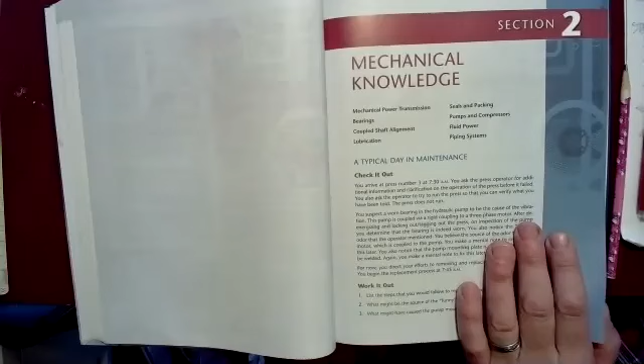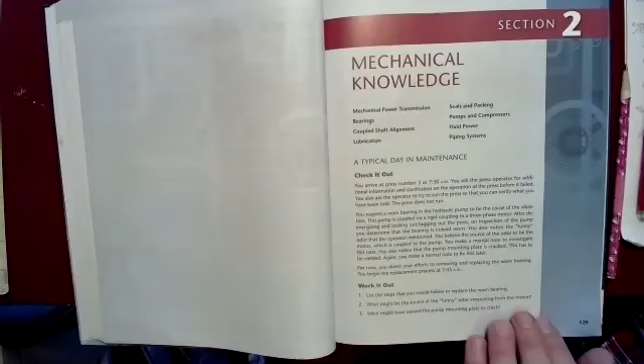So in Chapter 6, we're talking about the beginning of Section 2. Section 2 in the book gets into the mechanical knowledge, and this is pretty much half of the program. It touches on half the program. It's all the good mechanical stuff, and this is a very important aspect of power transmission.

We're going to spend a lot of time in the lab playing with these elements, playing with the V-belts, pulleys, shivs, gearboxes and motors. So we're going to be doing all that in the lab. It's pretty free form, which is why we want to give students as much time as possible. Only one student per lab per system, so you're going to be setting up your entirely own system.

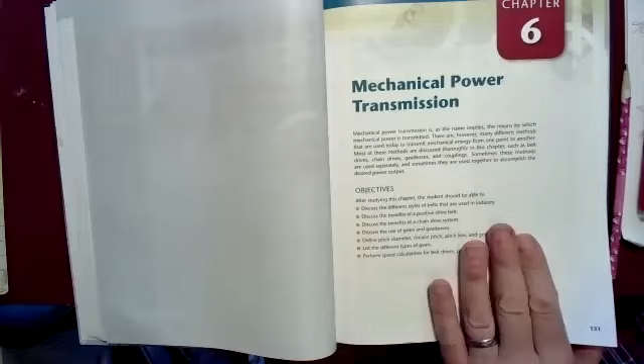So in Chapter 6, we start talking about belts and shivs. Now that's the first bit of important learning. When you're reading the book, you'll recognize that term is called a shiv, not a sheave. A lot of people make that mistake unless you're in the industry. If you know what you're talking about, you're not going to call those things that let belts and V-belts ride in sheaves. You're going to call them shivs.

And so that's a very important distinction. As we get through this, make sure you use that properly pronounced, and you will be a lot smarter sounding to all of your compatriots when you first get on the job site.

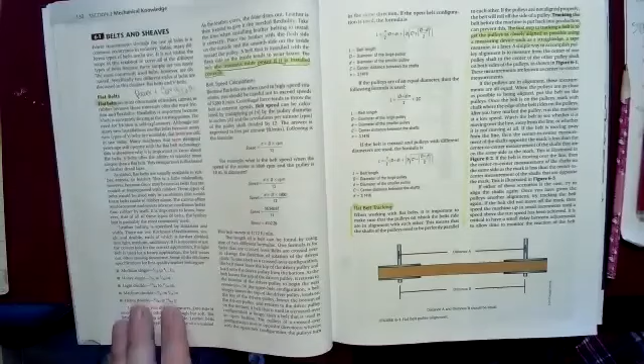The book starts talking about flat belts, and you're going to see a lot of flat belts out there. The book mostly talks about power transmission flat belts. In other words, the idea that you have a drive side, a drive pulley, and then the belt's used to convert the power from the drive pulley to a separate machine or a separate pulley. But in many cases in the real world, you're going to run into flat belts being used as conveyors. They convey material or boxes from one point to another, and there's usually going to be a drive pulley on that conveyor. All the same calculations in terms of tracking also apply to conveyors.

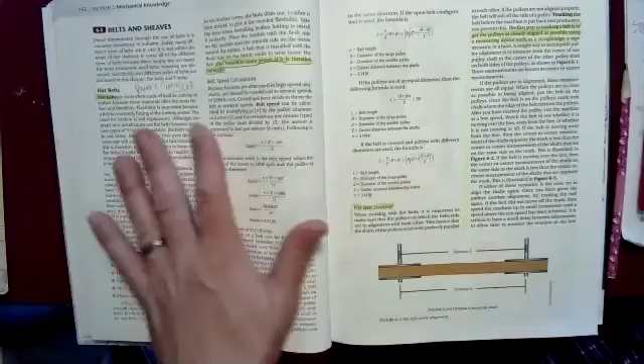The book takes you through a little background, talks about leather, rubber and canvas. Obviously canvas belts are very old school as well. It takes you through the different sizes and a basic speed calculation, which is very simple. All I can say is read through this very carefully. We're probably not going to do a whole lot in terms of calculations on my tests about speed, but understand all these terms. Understand what light duty versus heavy duty versus medium duty really means in terms of belt sizes. Just read through all this.

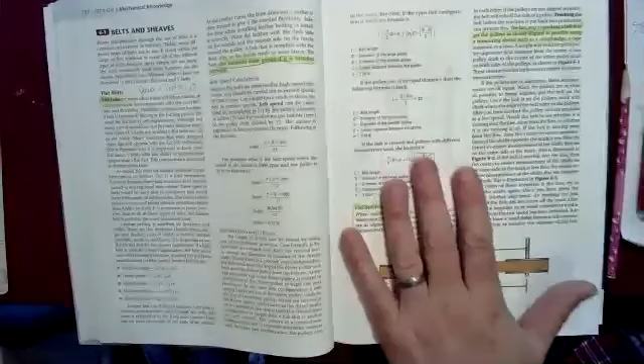The second part in 6.1 is flat belt tracking. Once again, this is really good. I wish I had run into this years ago. It takes you step by step, and I can't highlight this enough—I want to highlight the whole page. It takes you step by step on how to do your belt tracking.

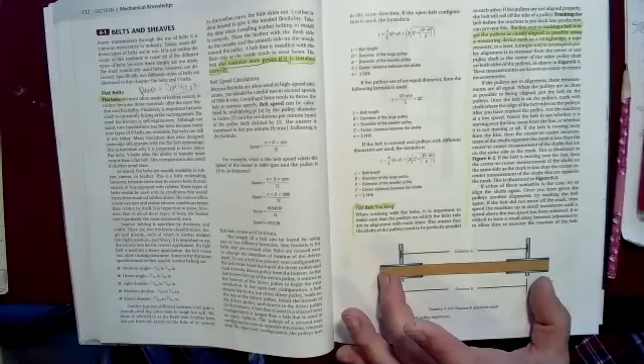The first step is always to do a measurement to make sure that your shafts are parallel, and the distance on one side of the shaft is the same as the distance on the other side. That's usually the best way to do it if you've got two shafts, your drive pulley and your idler pulley, separated by a long distance. You have to use a tape measure to do that, and it's hard to get exactly right. Then it takes you through a methodology with drawings of using something called a witness mark.

So as you track your belt, it wants you to start off really slow. If you speed it up, then the belt goes off quicker. So you start it off slow, make sure it tracks slowly, and then you speed up your system to make sure it stays tracking, and then you make adjustments as you go. The book takes you through all of that stuff. It's really good.

The book talks a little bit about the pulleys, the flat belt pulleys, talks about them needing to be generally larger than the belt. If your pulley is just barely big enough to run your belt on, then your belt starts running off even with a slight variation in the belt tension. Stretches a little bit, you're done. So you want a pulley that's big enough to have a little extra meat to run that belt on. This is really good stuff. Read through that—I can't emphasize it more.

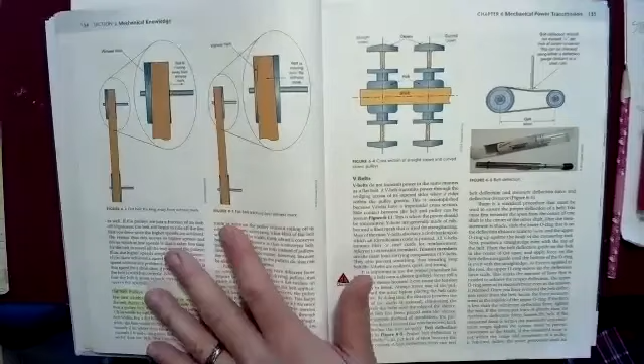Then on page 135, the book gets into V-belts. V-belts are probably more common than flat belts. Now, flat belts in the real world, you're going to run into a lot as conveyors, sometimes as power transmission, but more often as conveyors out in what we have in this region.

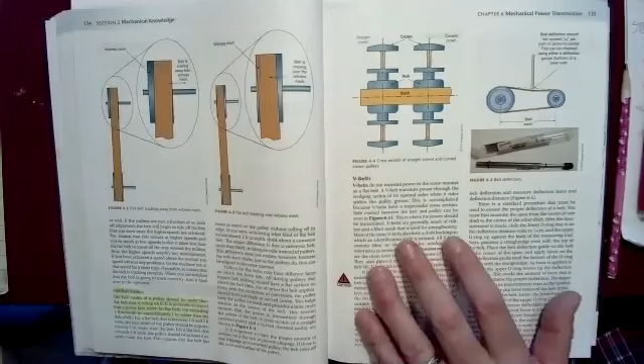V-belts are used everywhere, for power transmission, for pumps, for vehicles. I'm sure you guys have a V-belt running based on your engine, running power out to your fans and to your alternator. V-belts are probably the most common power transmission tool out there, period, of any you're going to run into. And you're going to have to replace these. They wear out, so if your V-belt needs replaced, you're going to have to know how to replace it.

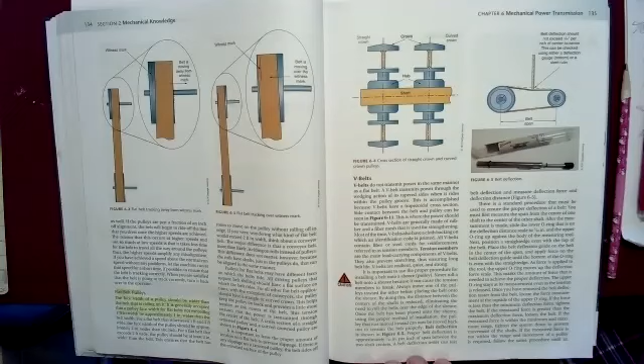The book goes through a whole process of how you install a V-belt. You will need to keep this book with you when we get into the lab. This will tell you how to do the steps in the lab. I'm not going to give you a separate procedure to follow. You will need to use the book, so bring it with you in the lab.

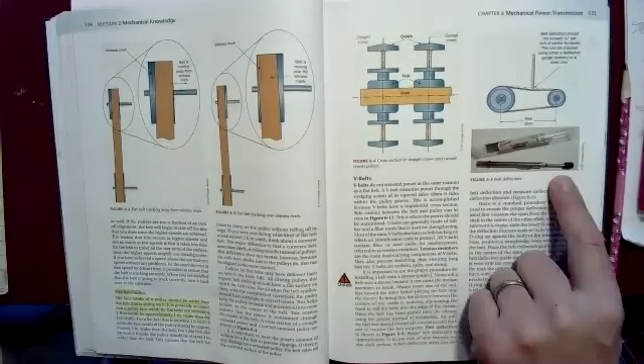You'll be using a tool like this to measure the force you apply, to see how far your V-belt is deflecting. That's a very, very important tool. And here it gives you the rule of thumb that you'll use to verify you have the right tension on your V-belt. I can't emphasize this more. I want to highlight this whole page as well. V-belts are critical, absolutely critical, for power transmission class.

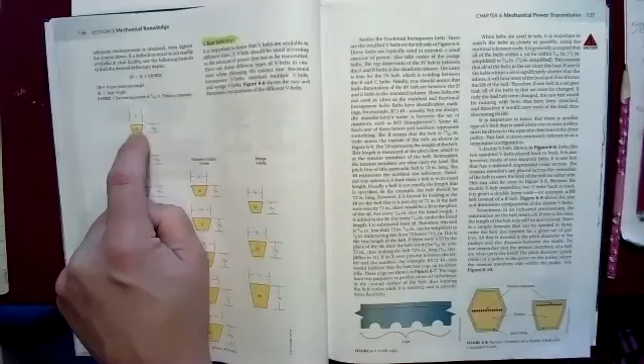On page 136, we're going through the different belt styles, and all these different cross sections. This is roughly to scale, maybe a little less than scale. It shows you all the different cross sections of belts and the codes you use to order that belt. So if you measure your belt and find it's 1/4 inch across and the height is roughly 5/32, we know that's a 2L belt. This is a really good tool to keep on hand, and that's why you want to keep this book on your bookshelf.

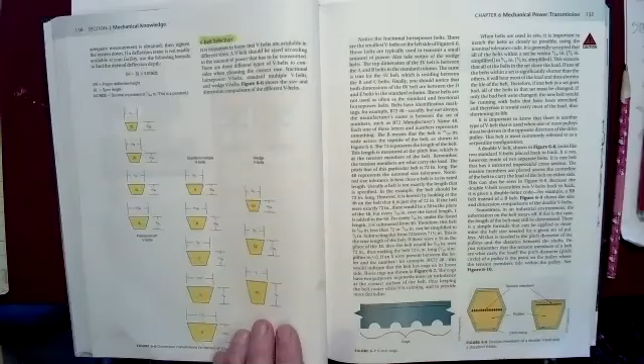Starting on page 136 into 137, it takes you through all the different descriptions of what these different codes mean and why they exist. That's really, really useful. This is the kind of stuff I wish I had a long, long time ago. It talks about double belts, for instance, this guy down here.

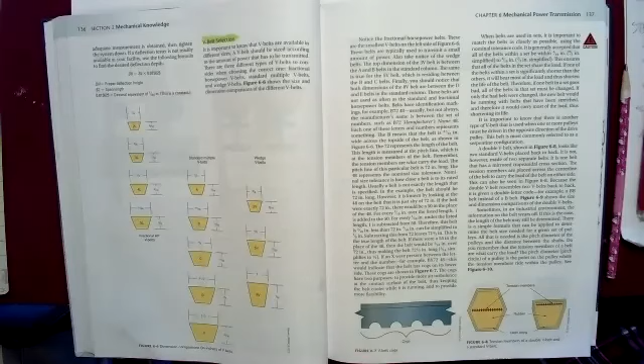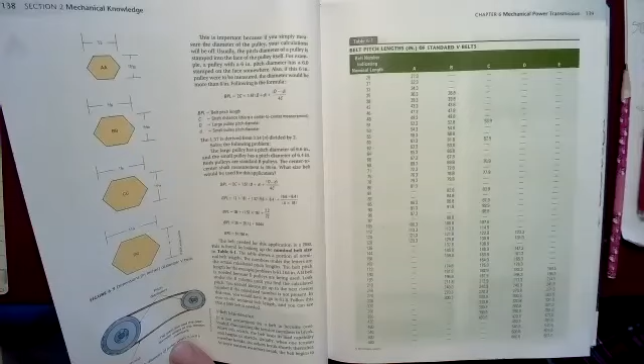It talks about what you do if the information on the belt wears off, and then it talks about how you calculate the length of the belt and that sort of thing. It talks about a pitch diameter. A pitch diameter is how you measure the length of that belt. You need to know the pitch diameter and where you'd find that. It is not the outside edge of the belt, and it is not the inside edge of the belt. It is the line on the belt that determines the optimal pitch of that belt system, and it is used for the measurement of the belt length.

They give you a great table in 6.1 on pitch lengths. So if you have a nominal length, you can calculate your different pitch lengths, depending on the belt style.

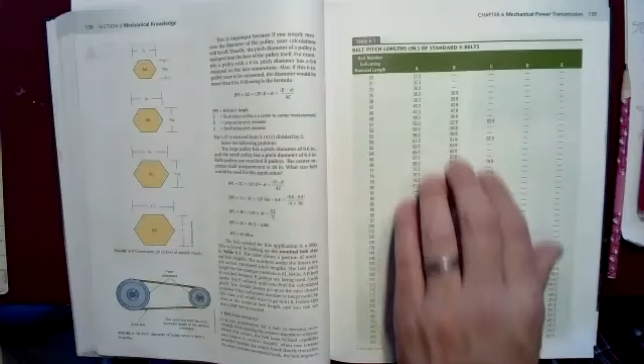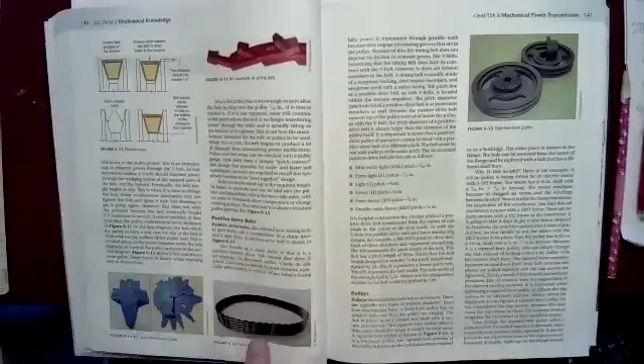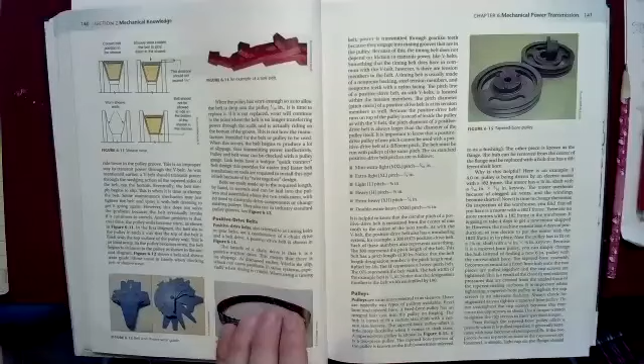And like I said, all that's really good. Now the rest of this chapter has some useful stuff too. It talks about positive drive belts—these are timing belts, typically called timing belts. They're belts with little grooves on the inside to give you a little more force without necessarily having higher tension, and they maintain a certain timing between the different pulleys that run those belts. So it talks about those belts and how they're made.

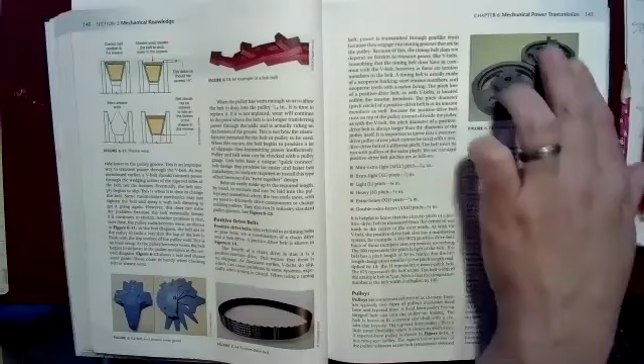In the section on page 141, we go through the different kinds of pulleys out there. It talks about different parts of a pulley and different methods of attaching that pulley to a shaft. There's a variety of different methods—sometimes you have a set screw, sometimes you get these fancy tapered bore pulleys.

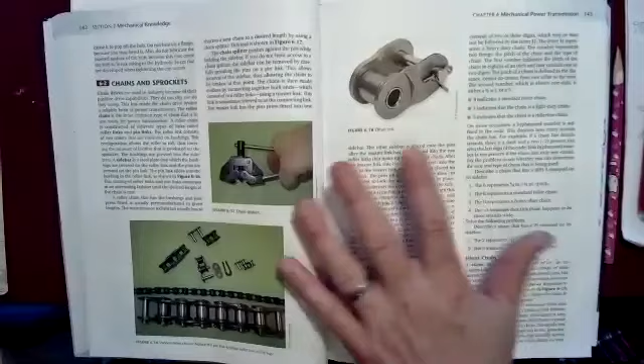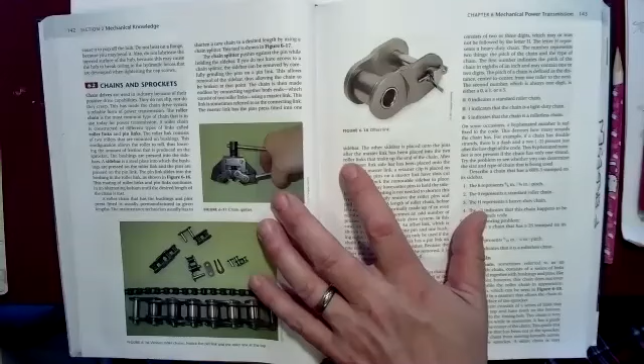Section 6.3, chains and sprockets. Many of you guys have ridden around on bicycles. Chains and sprockets are also highly used in industry. Anytime you've got a lot of force, a lot of power that needs to transmit between one sprocket and another, that extra power is usually going to be chain driven. Chains are great in terms of low speed, high power transmission. So this book does a great job, once again, of going through all the different standard ways of describing chains. I'm not going to emphasize any more.

A chain splitter is a useful tool for cutting open different links. I've used one of those many, many times. A lot of my roller systems have used chains because they need high power.

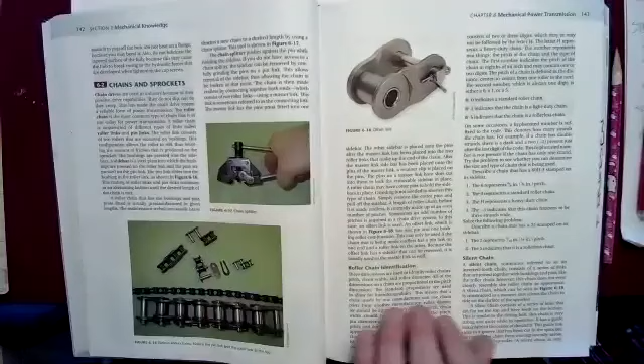On page 143, we get into some of the more obscure chains, like silent chains and ladder chains. Those are a little less common, but you can read about them and learn about them. It shows you a picture of a silent chain. Silent chains transmit power without making that clinking sound, but they're also able to work in a lower profile environment.

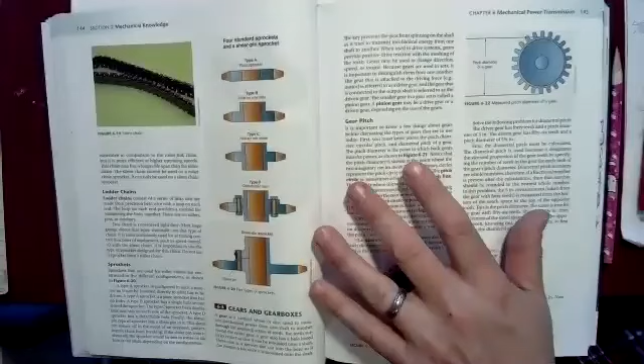Sprockets are the things that chains run on. So on your bicycle, you've got a front sprocket and multiple back sprockets, assuming you have a multi-speed bicycle. The book takes you through all your basic kinds of sprockets. It doesn't really hit heavily on the whole sprocket thing, just takes you through some of the basic types. This is really important to be able to look up quickly if you need one.

Section 6.3, at the bottom of page 144. Let me just...